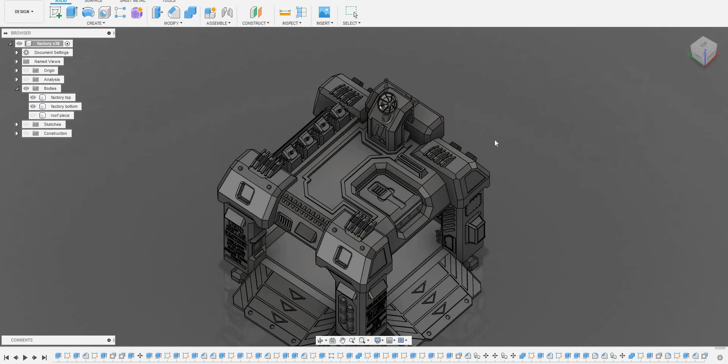I'm going to also pull up the concept art here that I used as reference to create this. The concept art is just a single image from sort of a diagonal view, kind of like this. But I'm a big fan of designing things how I want rather than sticking to a plan, so I'm using this art as just a concept to get an idea of how I wanted to go about creating it.

But we're going to do a quick flyby of the different features on this design before we do the commentary of the whole build.

We got a lot of detail here in the text. I wanted to put things from the lore in there, so I put the name of the structure as well as the different types of vehicles and machinery that it can create.

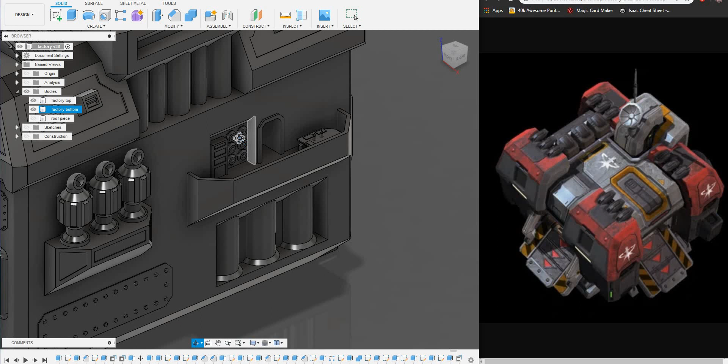You got a little sort of control center up top there. You can see there's actually a door there. So if we spin around to the back, I actually put a little break area, table, some drinks and chairs, and a bit of doodads sticking out the back. You can see through to the inside.

Everything on this design is designed to print without support and also consists of only two pieces. We have the base and we have the top. So it's very easy to print.

You can also tell from the satellite dish here, in order for this to print with no supports, I couldn't really have a steep overhang coming out like a regular satellite dish would. So I kind of gave it a feature that would allow it to print without needing that support structure there. We got a gap here and a bridge under there as well.

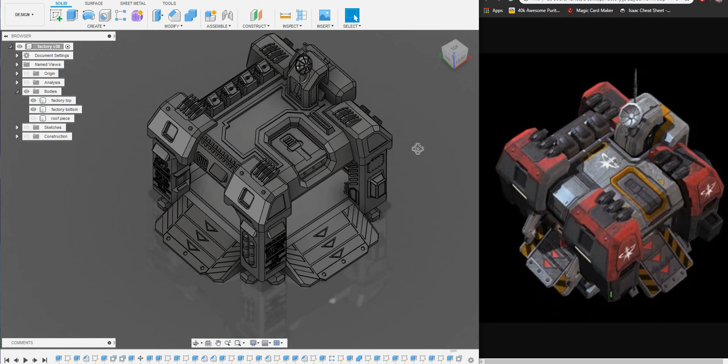I've also done the supply depot, another structure from StarCraft. See, we got some detail on these on-ramps here. And generally on every flat face, I'm looking to have at least some detail there.

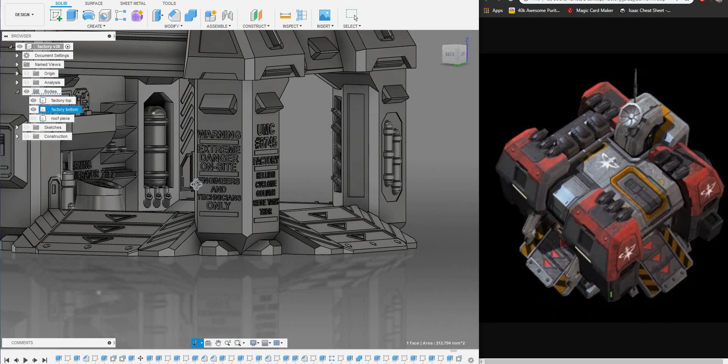We got a door there, leading upstairs through the inside to there. Got some doodads on all the walls, a few artillery shells, some exhaust vents up top, and making sure to have features from all angles.

So now I'm going to turn on the sketch data, because you may be wondering how you go about creating this 3D model. Where did it come from? It pretty much entirely came from sketches that I created in the software, just 2D designs using lines and circles. So I'll turn those on now, and they will be overlaid on top of the solid 3D model that you can see.

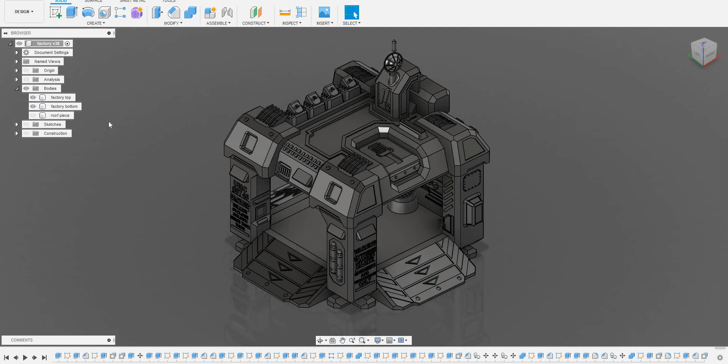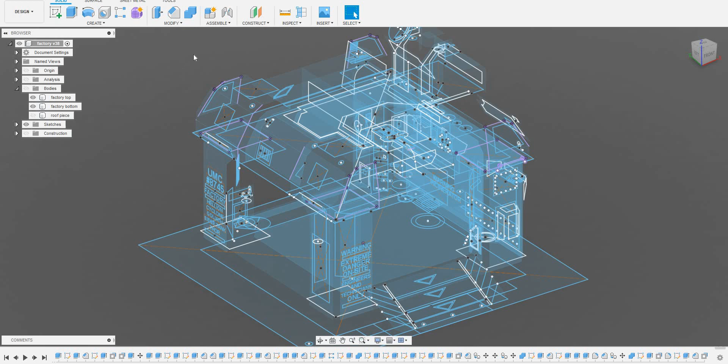So there's all the sketch data. You can see there's a lot of stuff going on. A lot of it is multiple layers deep. But it's kind of still very cluttered, so I'm going to turn the 3D model off. And now we're just looking at the sketch data.

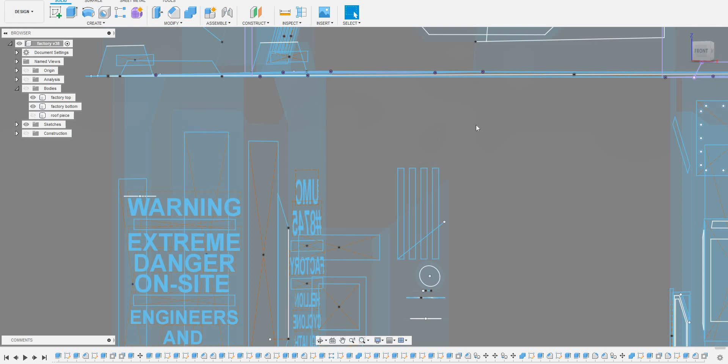I pretty much drew all of these lines just by hand, basically. Some of them were projected, though. You can see how some of these lines right in this area have no defined edge to them. Some of these lines have very defined white or blue lines. These sketches do not have a line - like, I can highlight something, but it's not actually there. Those are projected geometries, so that's actual sketches taken directly from the 3D models that those planes are on.

You can see our ramp here. I just designed one ramp and then copied it a few times.

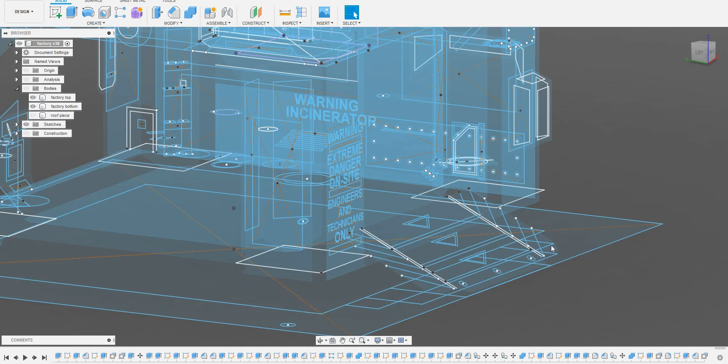And then along the bottom here, we have our design history. Every one of these little buttons is a function I used to create something. The ones that look like little pencils and paper for sketching is a sketch.

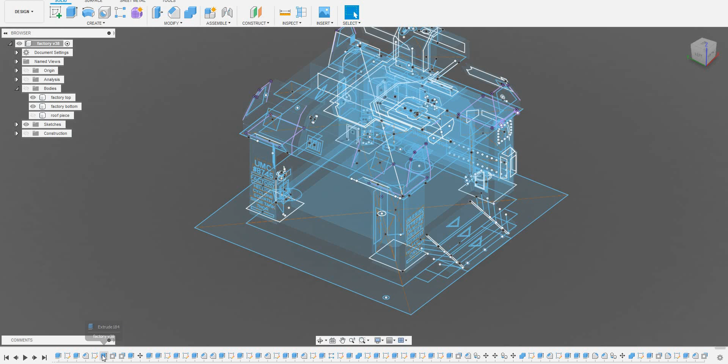And these blue rectangles that look like extrusions are an extrude function, which you use to pull a 3D model out of a sketch you've created. And we have our chamfers for chamfering,

pattern functions for creating multiples of the same object, copy commands, move commands, and lots of other commands. We have a very long list here, lots and lots of commands, all the way back to the beginning.

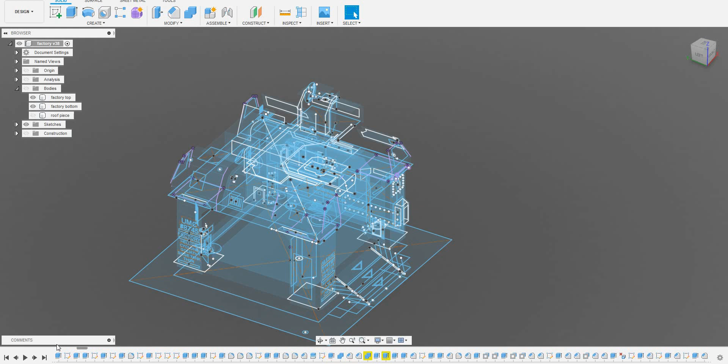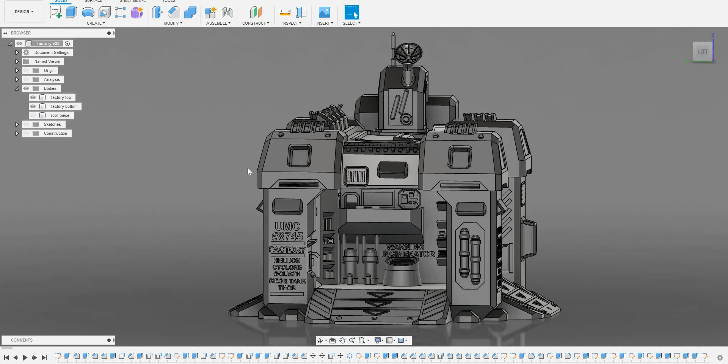So what I'm going to do now is position this model in a position that gives us a pretty good view of most things that are going on. And now I'll turn the sketches on as well.

Now I'm going to hit the play button at the bottom here, and I'm going to provide a commentary of the design as it replays itself. Because it's captured all these functions, it can replay every single command to show us a time lapse basically of the creation process. So let's begin.

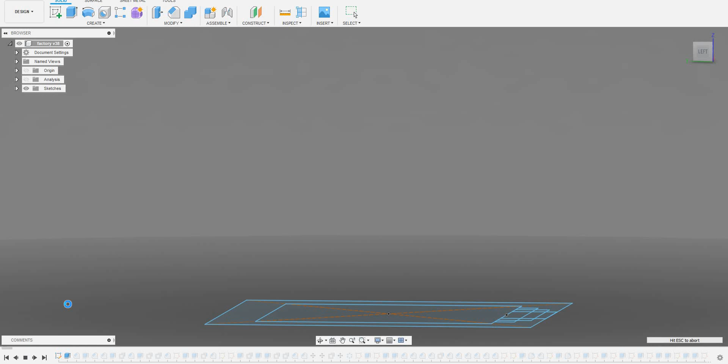So we start at the beginning with a few sketches of some rectangles to create the base. We can see I'm now working on that path here. All I've done is sketch some triangles and some lines on different angles and used extrude commands to extrude those sketches into the shapes that they are.

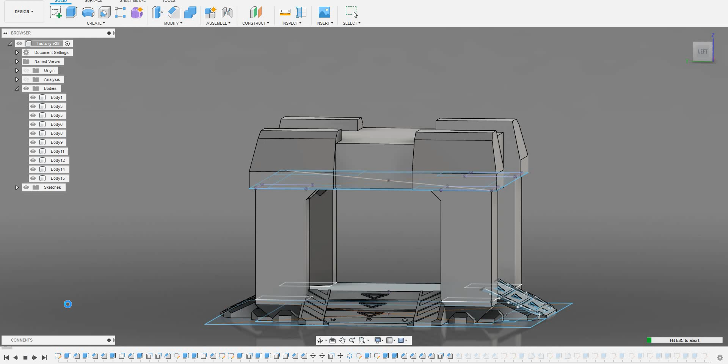Now we work on the base structure here, very simply blocking it in and getting a general shape and sense of scale so I know how big certain features should be made. Now that I have my scale and my maximum dimension set, I can start to refine my 3D model, going from simple blocks to more complex geometry.

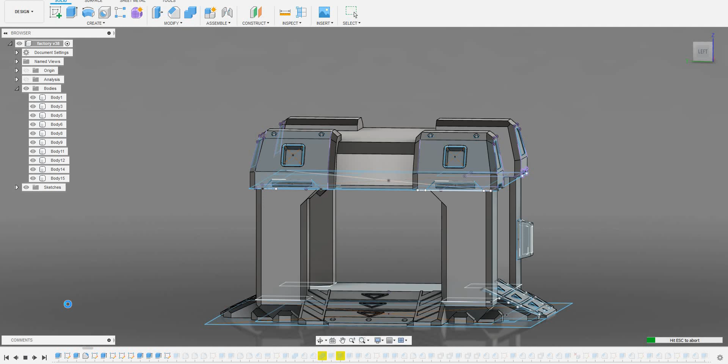And we can see all the sketches appearing as I sketch the design out first before it becomes a 3D model. Now I'm adding some detail on the front of the roof, and there's some detail going in on the top as well.

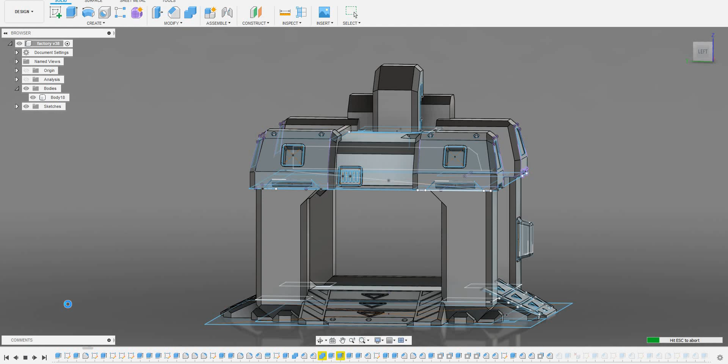While it's going through this process, I cannot actually move the camera, so this will be the camera view that we have. But we'll be able to see all the sketches. Now the back wall is coming in. And there's more detail going on the roof. You can see those sketches appearing there.

And now I'm starting to shape one of the exhaust vent structures on top. And once I've got that mostly refined, I can then copy it a few times.

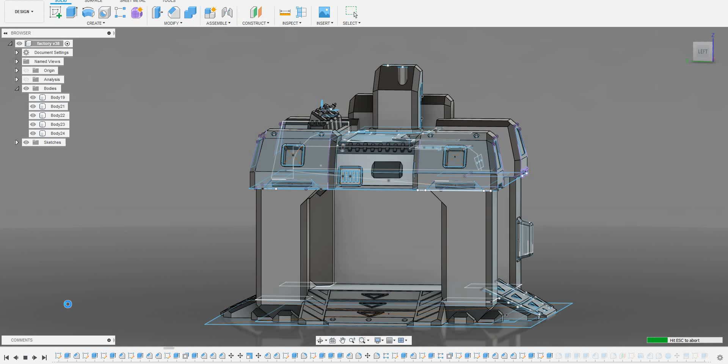And now we slowly just increase the density of the geometry on the model until I have an amount that I am satisfied with. Now we're adding that satellite dish.

Adding some more detail to it. It'll be one of the main focal points, so I wanted to make sure it was worth looking at. So you can see there's quite a bit of detail on it.

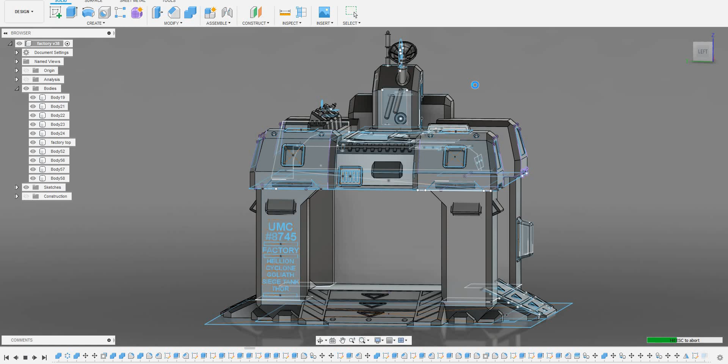And now we add some more detail to the front face. A lot of this detail I'm adding is just generally simple shapes. So we can see up here, there are those two cylinders that are tilted slightly with a ring underneath. It doesn't look like anything else, so it reads as its own thing and just adds to the visual information the design gives.

We've got our text right here. I actually sketched this text using the text function of Fusion360 and then just used a simple extrude command. So all of this was done effectively with 2 commands, which is really nice.

Now I'm starting to block in the control center on the back. Adding some doodads on the wall, a little chalkboard looking thing, as well as some controls beside it.

Now I'm adding some detail on the inner walls here, making some little shelves with objects on them, making sure to try and differentiate things as much as possible. I want to have the most impact for the least amount of effort.

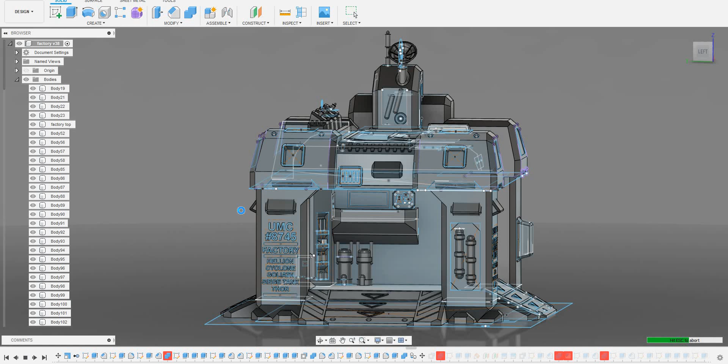Got a couple gas burner jiggers here. And now we have our incinerator coming in as well.

We're adding some detail on the right side here, filling these walls up. We have something that looks like a cupboard of some sort, and some diagonal rectangles on the side.

As long as you have a few centerpieces of the design, everything else just plays on that and gives you something with a fidelity that people enjoy looking at, seeing all the different little bits from all the angles.

Now we're adding some shelves here and copying and pasting them, and there's a few small bits going on these shelves. You can see a little jigger there and a couple other jiggers beside it.

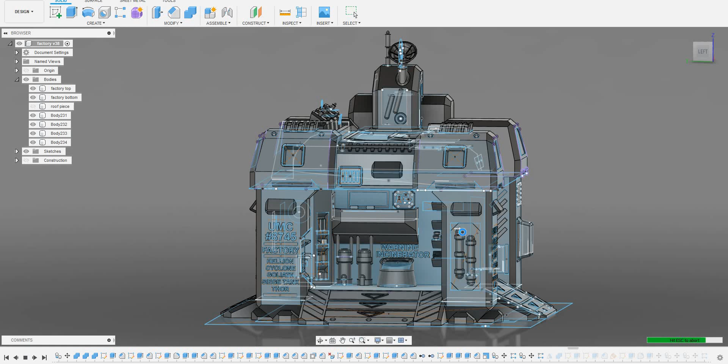More detail on the left side over there. Some of these objects, like these triangular shapes here, there's one peeking out the side, are there to represent lights, and it's just a single object copied and pasted. Same with these cylinders here, they're just cylinders of different shapes and sizes, merged and given smooth filleted edges.

So most of the detail is in now, and we're starting to refine things.

It would be really nice if Fusion360 had an option where you can press a button to pause this function that turns the camera, then let go of the button to resume, so you can continue viewing it from another angle. That would be a really nice feature, because there's not a lot we can do right now. I can't move this camera.

And we can see those doors going in the control area, leading to the path out back. And now we can see the sketches going in for the ledge with the little break area on it, and sketches going in for a few of the doodads I have out back.

A lot of the shapes on this, like these little hook looking features on the top here, I just designed one of them, and once I have that one designed, I can copy and paste as many as I want anywhere I'd like. And if I ever need to change them, I can just change that one original one, and it will modify all of these with the same changes. So it's really quick and easy if I need to change a feature on something that there are many of.

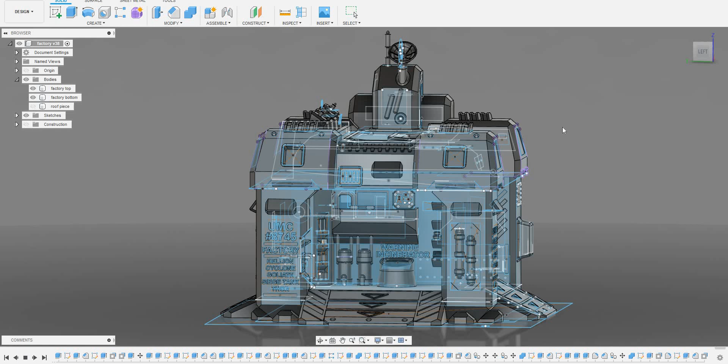And I believe we have finished. There we go. That's how we made our factory.

So I'm going to cut back to just the very beginning now, and we'll walk through just the first couple steps.

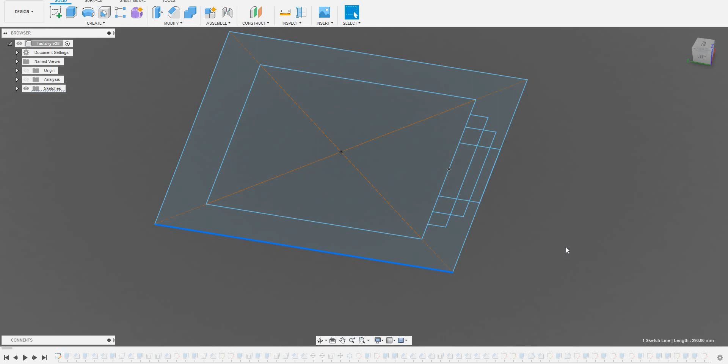So first we can see our sketch here. This is where I defined the maximum size I wanted this thing to be. Our 3D printers have a build area of 300 millimeters on the X and the Y, and 400 on the Z, so I wanted to keep it below 300. So we can see we're 290 by 290. So I know that my design will fit within the confines of our printers.

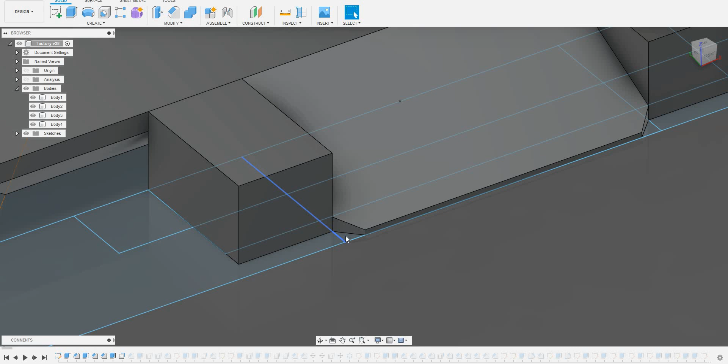Now I'm starting to create the base and starting with the ramps. So I've just been doing extrude commands and chamfers to create angles like that.

I can use this extrude command here, select an enclosed sketch, and now we can see I can pull a 3D object out of that sketch. And that's the vast majority of the process done to create this.

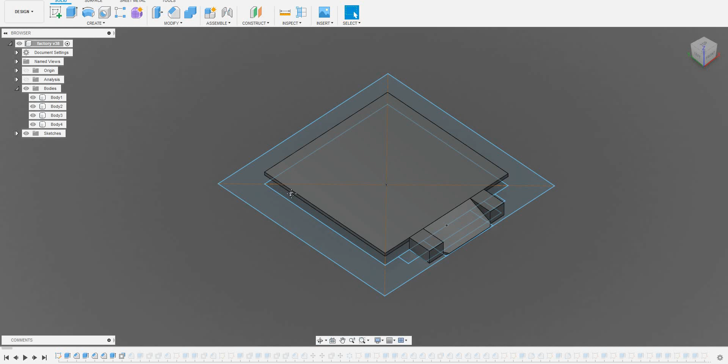And go ahead, skip a few more steps, see as we continue to add more and more detail to this. I can hide my model so you can see the sketches on that plane.

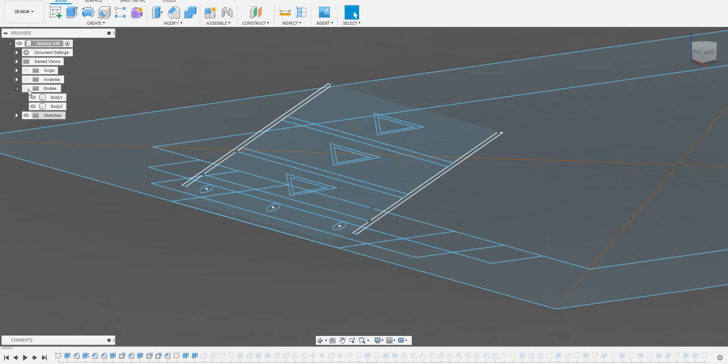And that is my commentary on my factory that I've designed in Fusion360 from StarCraft 2.